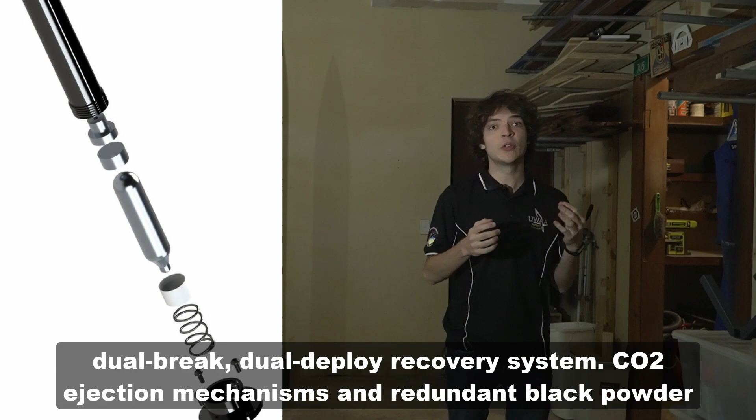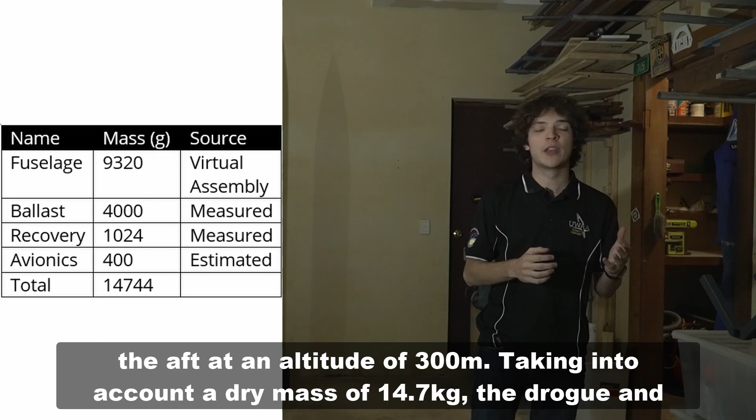Kuka features a dual break, dual deploy recovery system. CO2 ejection mechanisms and redundant black powder charges ensure the ejection of a drogue parachute from the nose at apogee and a main chute from the aft at an altitude of 300 meters. Taking into account a dry mass of 14.7 kilograms, the drogue and the main achieve descent velocities of 23.6 and 7.46 meters per second respectively.

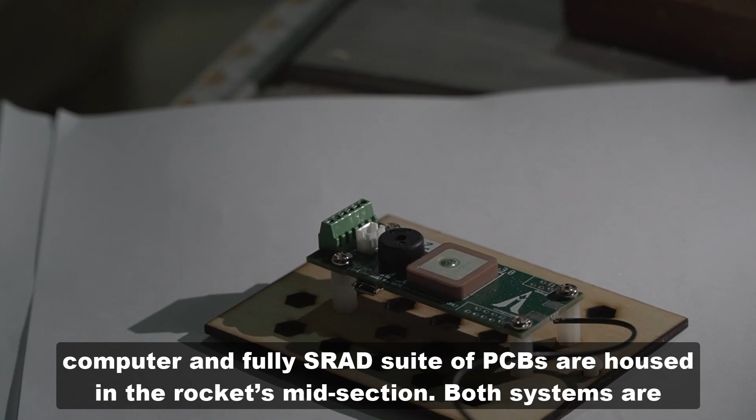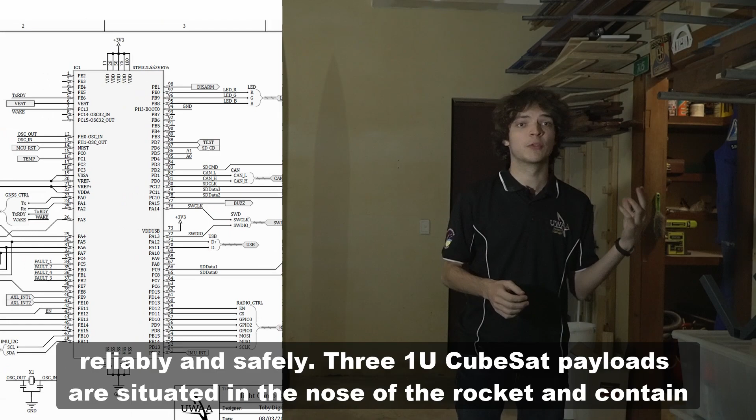A TeleMetrum flight computer and fully SRAD suite of PCBs are housed in the rocket's midsection. Both systems are capable of logging GPS and inertial data, as well as actuating the deployment mechanisms reliably and safely. 3 1U CubeSat payloads are situated in the nose of the rocket and contain adjustable ballast up to the weight of 5 kilograms each, or 15 kilograms in total.

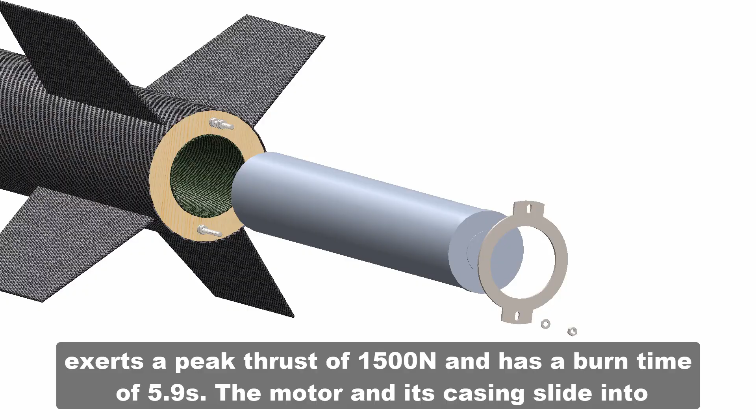The M1290 motor and accompanying Pro 98 3-grain 98mm casing weigh a total of 7.4 kilograms. This motor exerts a peak thrust of 1,500 newtons and has a burn time of 5.9 seconds. The motor and its casing slide into the motor tube from the bottom of the rocket and are secured by a retention plate. The rocket fuselage is split into 3 sections: the aft, the mid, and the nose.

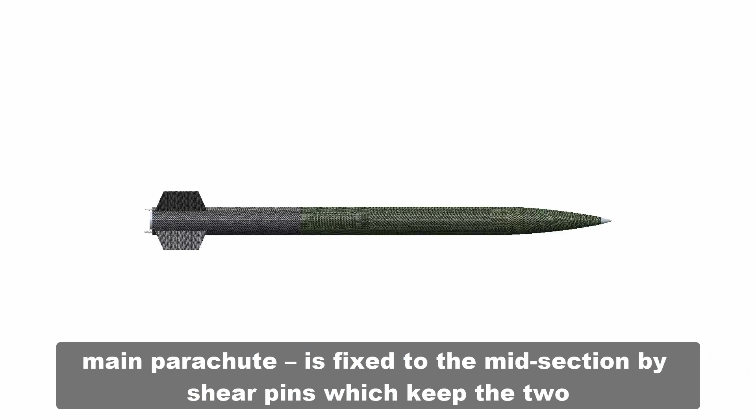The nose, which holds the main parachute, is fixed to the midsection by shear pins, which keep the 2 sections joined until main deployment. The nose has an aluminium tip to protect against temperatures generated when the rocket reaches its near supersonic maximum speed.

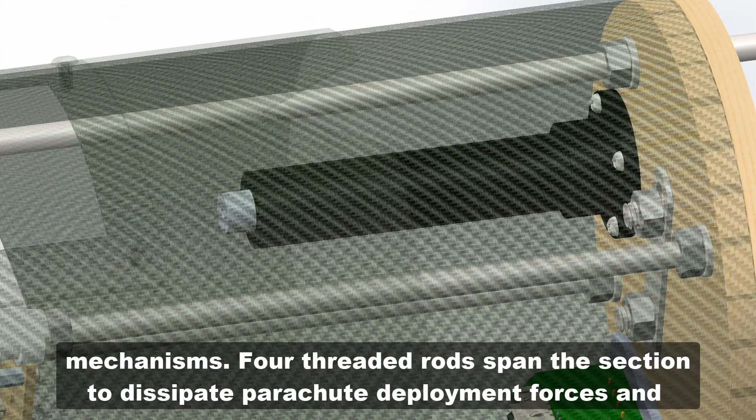The midsection houses the Student Researched and Developed Avionics PCB suite, our commercial off-the-shelf flight computer, and CO2 deployment mechanisms. 4 threaded rods span the section to dissipate parachute deployment forces, and all avionics are mounted onto our modular rack system, which utilizes these threaded rods as attachment points.

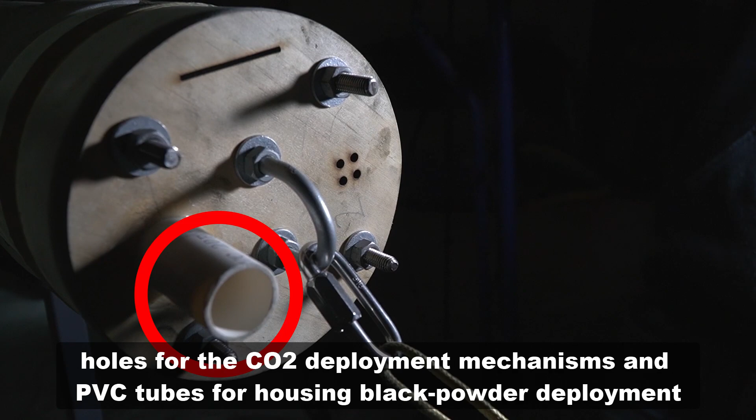Bulkheads are located at either end of the midsection. These feature venting holes for the CO2 deployment mechanisms and PVC tubes for housing black powder deployment charges. Additionally, inbuilt pyro terminals allow for quick attachment of E-matches and an electrical connection through to the midsection.

Through a combination of OpenRocket and SolidWorks, the launch of Kuka on our chosen motor gives a minimum stability of 1.45 cal and a thrust to weight of 5.94.

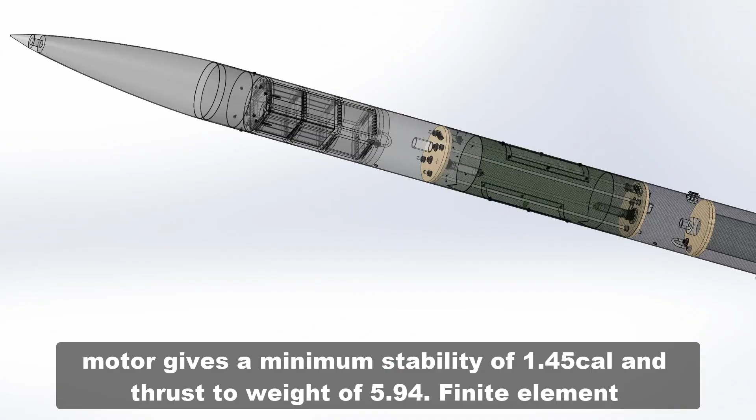Finite element analyses have shown that the engine block and bulkheads exhibit a minimum safety factor of 11.2 across all possible failure modes arising from parachute deployment forces and motor thrust. Hand calculations were carried out using the aeroelastic fin flutter equation to validate the rocket fin thickness and ensure it will not fail due to flutter.

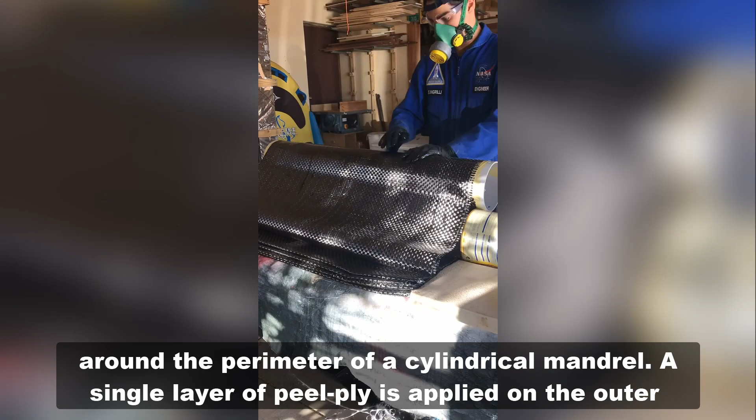All fiberglass and carbon fiber components inside the rocket are hand-laid by the team from fabric and resin. The main fuselage tubes are made by wrapping 6 layers of 200 grams per square meter twill weave fabric around the perimeter of a cylindrical mandrel. A single layer of peel-ply is applied on the outer surface for smoothness, and the composites are left for 24 hours before being cured at 80 degrees Celsius for a further 4 hours.

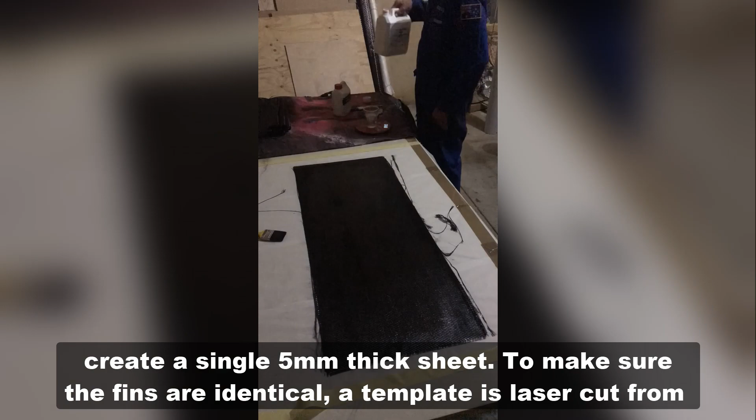The fins are laid up with 12 layers of 250 grams per square meter carbon fiber fabric on a flat surface to create a single 5mm thick sheet. To make sure the fins are identical, a template is laser cut from the plywood and cut exactly onto the carbon fiber fins with a flush cut router.

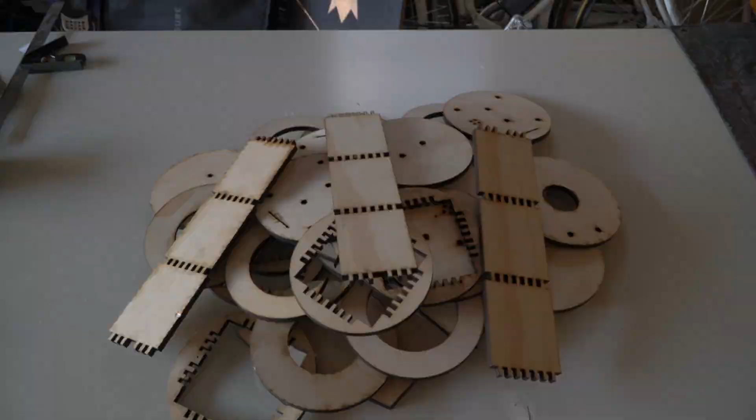Bulkheads, centering rings and mounting fixtures inside the rocket are made from plywood, an inexpensive and lightweight material whose alternating grain pattern offers superior strength and humidity stability compared to regular wood. The laser cutter allows us to manufacture these parts very quickly with a high level of precision.

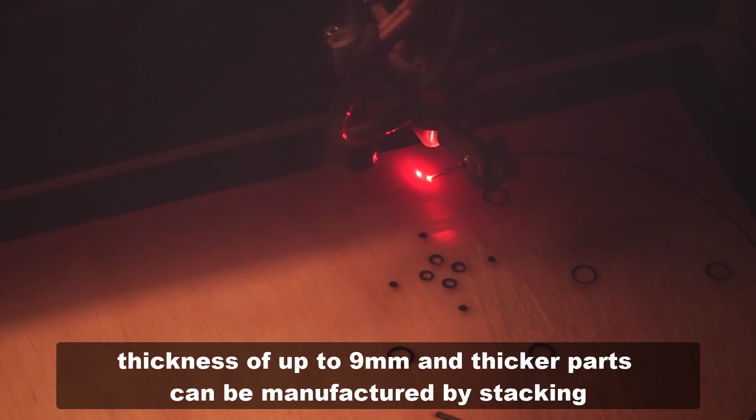The laser can cut a thickness of up to 9mm, and thicker parts can be manufactured by stacking multiple layers and adhering them together with wood glue. Three-dimensional shapes are created from multiple flat pieces through interlocking box joints. All centering rings and bulkheads are secured to the body tubes with 10-hour epoxy fillets.

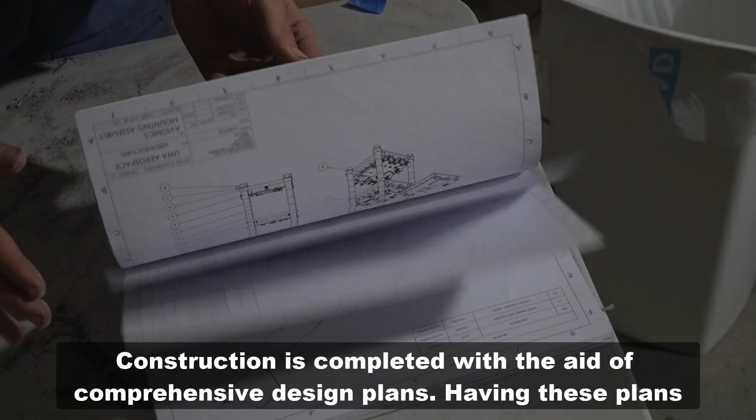Construction is completed with the aid of comprehensive design plans. Having these plans completed before manufacturing has made the process significantly easier.

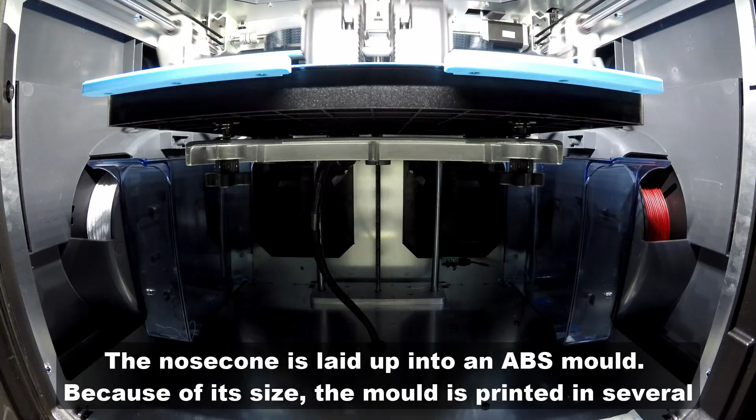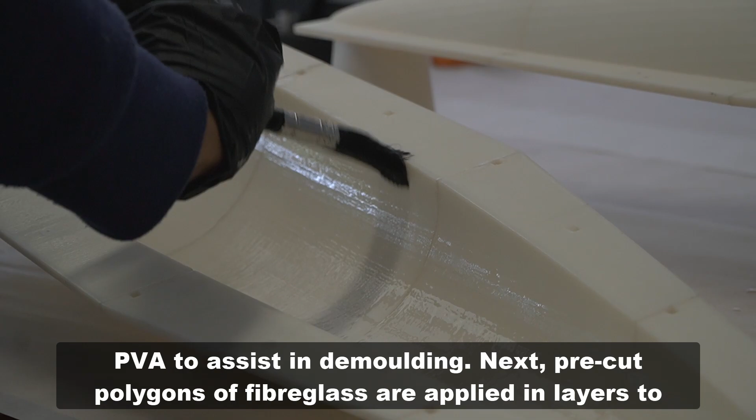The nose cone is laid up into an ABS mold. Because of its size, the mold is printed in several segments before being sanded and superglued together. The mold is then coated in 5 layers of PVA to assist in demolding. Next, pre-cut polygons of fiberglass are applied in layers to the 2 mold halves and adhered with epoxy resin. A lip is left on each half, which is used to join the mold together.

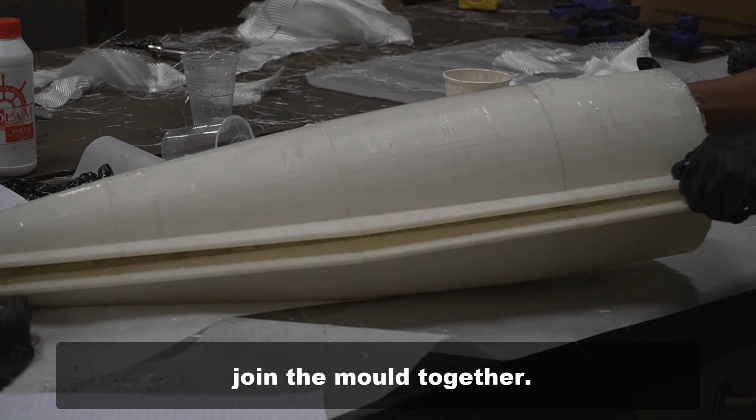This rocket will be recovered with a dual break, dual deploy deployment scheme. At apogee, the aft section of the rocket will separate from the midsection, releasing the drogue parachute. At 300 meters, the nose of the rocket will separate from the midsection to release the main parachute.

A dual break, dual deployment scheme was chosen over any single deployment scheme as it allowed for the inclusion of a drogue parachute that would greatly reduce the drift away from the launch pad with a fast initial descent. UWA Aerospace has also experimented with single break dual deploy mechanisms, and these were found to be less reliable due to the risk of tangling. A dual break mechanism ensures that all recovery components are kept within the body of the rocket until they're released.

The drogue parachute is a semi-ellipsoidal design with 10 gore panels and a spill hole that comprises 4% of the canopy volume. 10 suspension lines are attached to the canopy of this parachute.

The main parachute is a parabolic design and the canopy is made of 6 panels. The design is inspired by Rocketman's high-altitude balloon parachutes. The main parachute has only 4 suspension lines, which simplifies packing and storage procedures and reduces the risk of tangling on inflation. Both parachutes were manufactured in-house.

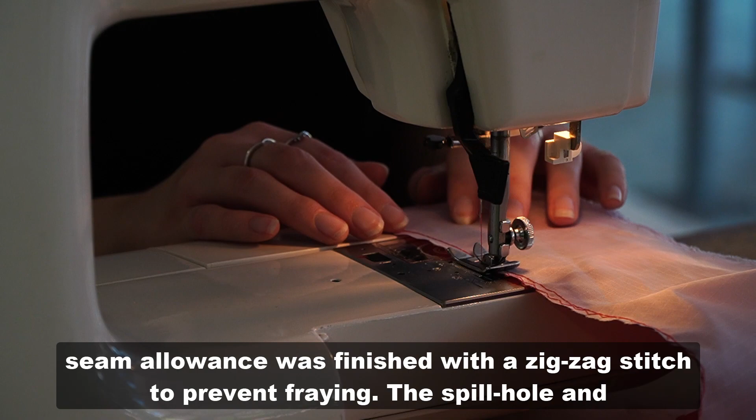The manufacturing of the drogue parachute involved the sewing together of the 10 gore panels with straight seams. Each seam allowance was finished with a zigzag stitch to prevent fraying. The spill hole and the skirt of the parachute were finished with bias binding, also to prevent fraying.

As the main parachute consists of only 6 panels, a stronger seam was opted for. Each of the panels were joined with a felled seam.

A commercial, exhaustless Peregrine carbon dioxide recovery device is used to actuate parachute deployments. A 12-gram unit is used to eject the main parachute, and an 8-gram unit is used for the drogue parachute. Carbon dioxide deployment was chosen over traditional black powder charges to minimize the risk of explosive damage to rocket components.

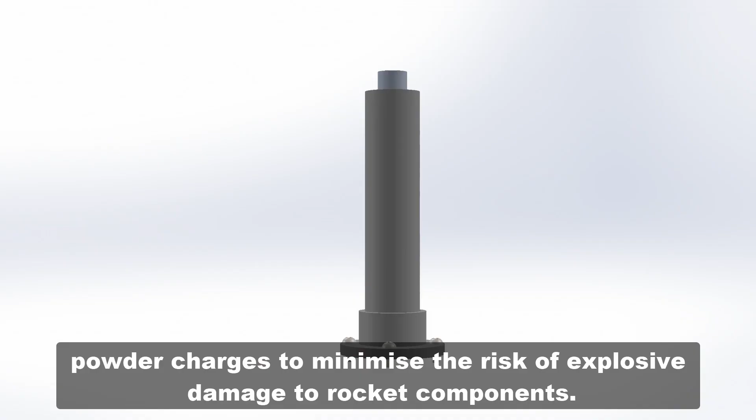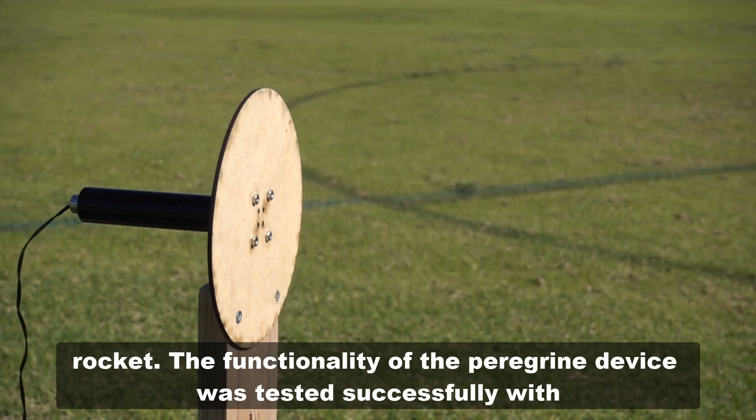The Peregrine works by detonating a very small sealed black powder charge to push the carbon dioxide cylinder into a pin, causing the gas to vent through the bulkhead and separate the rocket. The functionality of the Peregrine device was tested successfully with both 8-gram and 12-gram CO2 cartridges.

The parachutes were wind tunnel tested to confirm their inflation and stability. Both the main and the drogue parachutes were tested here in the University of Western Australia's wind tunnel at its maximum velocity of 7.7 meters per second. The test confirmed that both parachutes were able to fully inflate as expected with no major parachute fluttering.

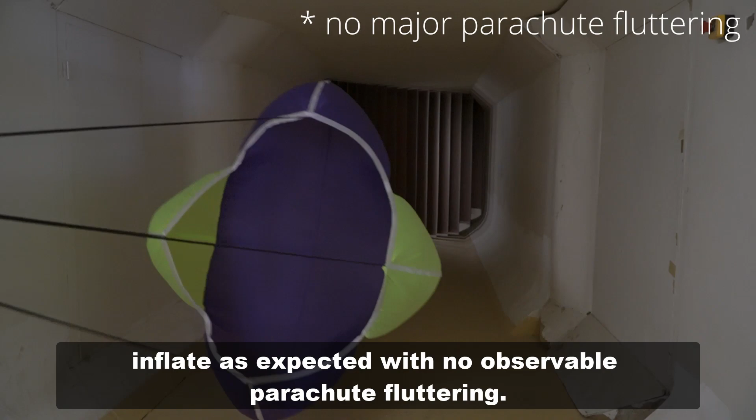Ground testing of primary and backup release mechanisms was also conducted. The CO2 system was able to separate the body tubes of the rocket and successfully eject the parachute. The redundant black powder charge was also successfully tested, and a charge size of 4.25 grams was found to be sufficient.

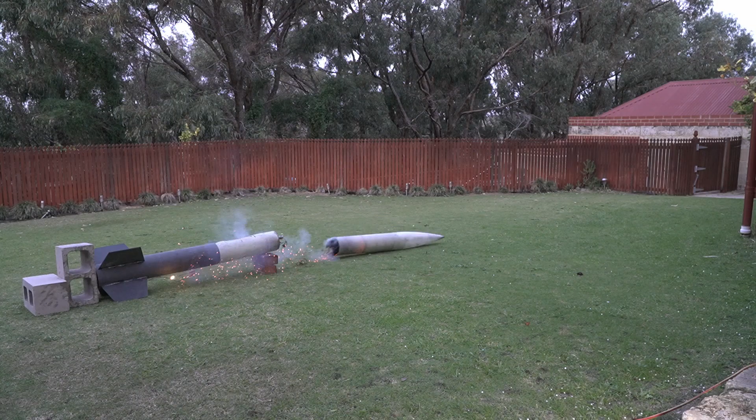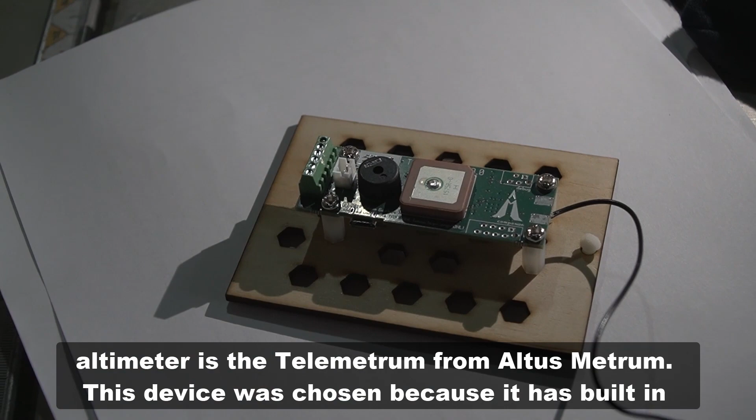The avionics consists of 2 independent systems, one COTS and one SRAD. Our COTS altimeter is the Telemetrum from Altus Metrum. This device was chosen because it has built-in GNSS tracking and a 433 MHz ISM transmitter to provide downlink. Additionally, it can detonate up to 2 E-matches, which is required to operate our dual deploy system.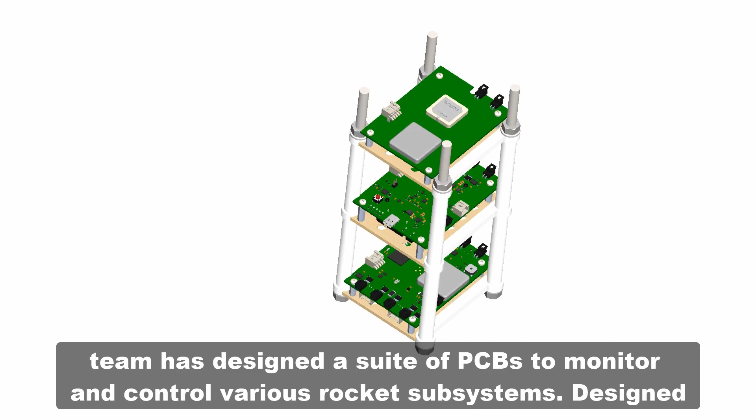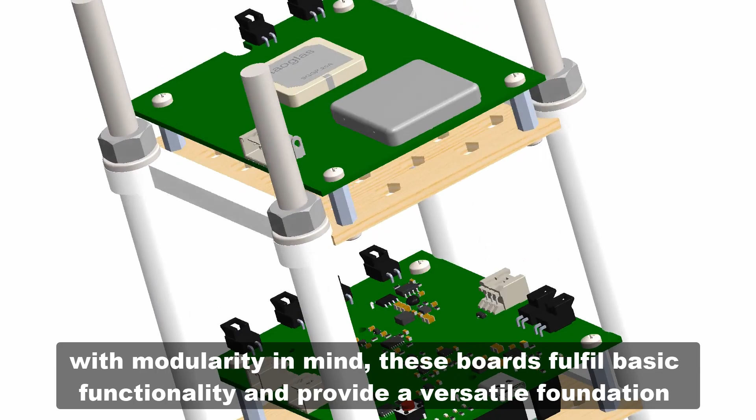The team has also designed a suite of PCBs to monitor and control various rocket subsystems. Designed with modularity in mind, these boards fulfill basic functionality and provide a versatile foundation for future expansions and experimental subsystems. The first of our custom PCBs is the power management system.

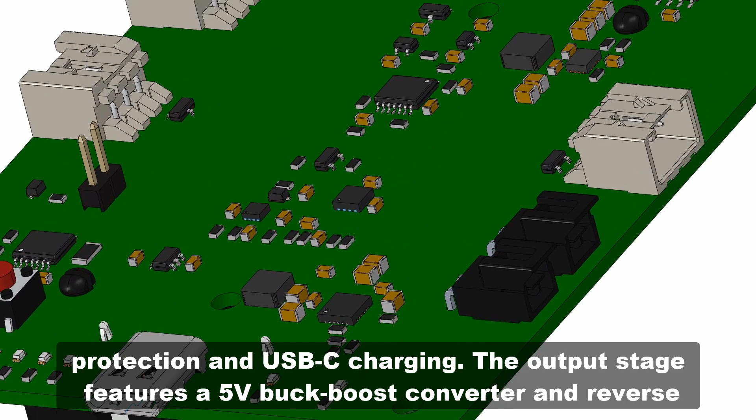This board delivers power to all other modules in the avionics. It features a lithium-ion battery pack with built-in battery protection and USB-C charging. The output stage features a 5-volt buck boost converter and reverse power flow protection. The pack also includes custom switch circuitry, which ensures the system can only be deliberately powered on and off.

The heart of our SRAD system is the Altimeter PCB. This module includes a powerful microcontroller which reads sensors, performs flight calculations, and operates the dual deploy parachute system using our custom designed E-match ignition circuitry, which is optimized for reliability and safety.

The functionality of the altimeter can be extended to include tracking by connecting it to our GNSS receiver module. This board includes a large patch antenna designed to maximize received signal power and maintain satellite lock.

To break out E-match connections, we have developed a feed-through PCB which is assembled onto the bulkhead. Terminal blocks either side of the bulkhead allow energetic devices to be connected inside or outside the avionics bay.

Our system facilitates modularity with a few key features. The first is the ability to daisy-chain modules together through the power supply lines, which allows an arbitrary number of modules to be connected in parallel.

Additionally, the altimeter also features a CAN bus, which provides an interface for it to control any future expansions to the system. All connectors in the system include mechanical latching mechanisms to ensure they cannot be disconnected by vibrations or high acceleration events experienced by the rocket.

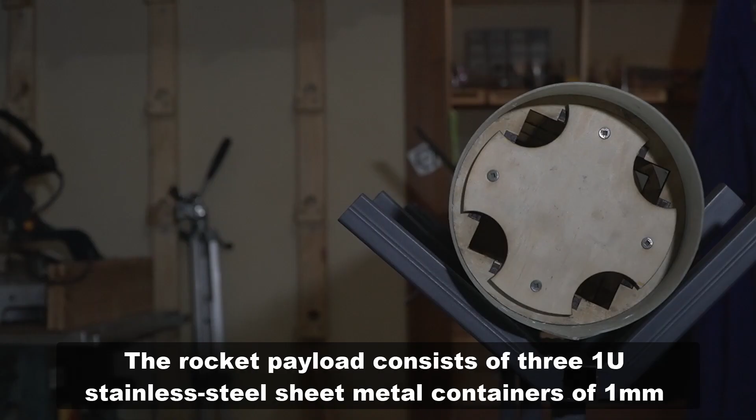The rocket payload consists of three 1U stainless steel sheet metal containers of 1mm thickness. Each container features dividers that allow for partial filling while maintaining a mass distribution that is symmetric about the longitudinal axis of the rocket. The containers are held in a plywood fixture that is glued to the upper body tube and are sandwiched between layers of foam that dampen movement during flight.

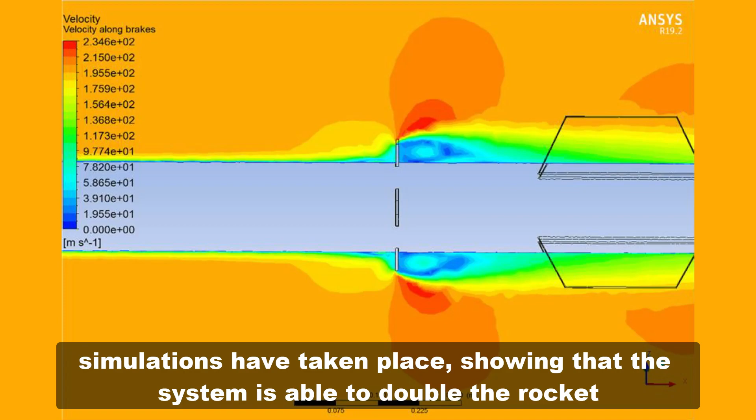The rocket flight was simulated on OpenRocket with a drag coefficient profile that has been produced on RASAero. We use a combination of both software since OpenRocket has a more user-friendly interface, but RASAero is more accurate at predicting the drag coefficient for transonic flow regimes.

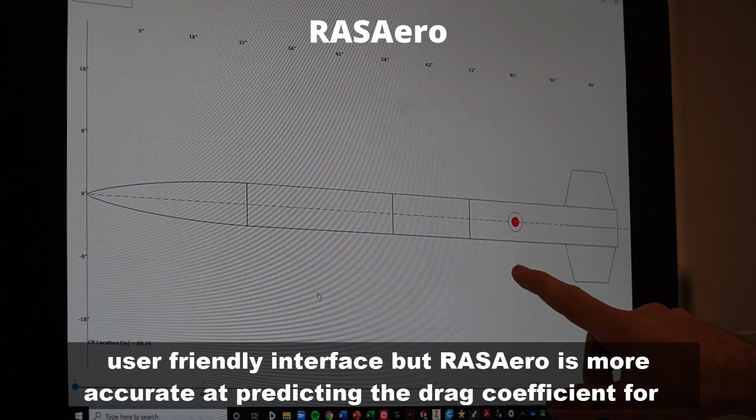Since trajectory simulations are carried out before the rocket is built, the mass of the rocket isn't known and we have to estimate it. An estimate of the entire fuselage mass and center of mass position is created from our virtual CAD assembly, which has the material density of every component inserted.

A total dry mass of 14.7 kilograms was overridden in OpenRocket, along with the center of mass position, and then we did a simulation on the M1290 motor.

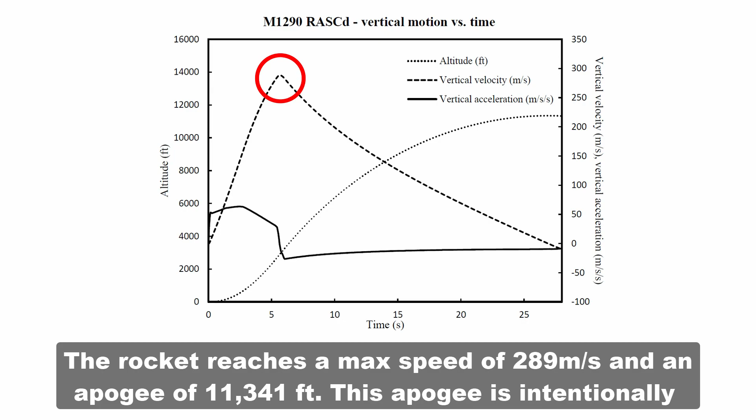The rocket reaches a maximum speed of 289 meters per second and an apogee of 11,341 feet. This apogee is intentionally over the 10,000 feet so the air brakes can reduce it.

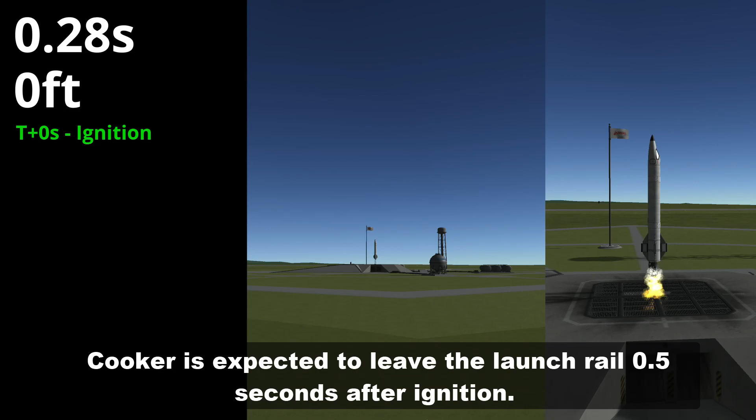KUKA is expected to leave the launch rail 0.5 seconds after ignition. It hits max Q 5.4 seconds later, followed by burnout of the motor after an additional 0.2 seconds.

The video you currently see on screen is a demonstration of our rocket's flight.

After hitting max Q, the air brake system will power on. The system references its current speed and altitude to that generated by a simulation reaching 10,000 feet with the brakes half actuated. It then adjusts its speed through actuation of the brakes.

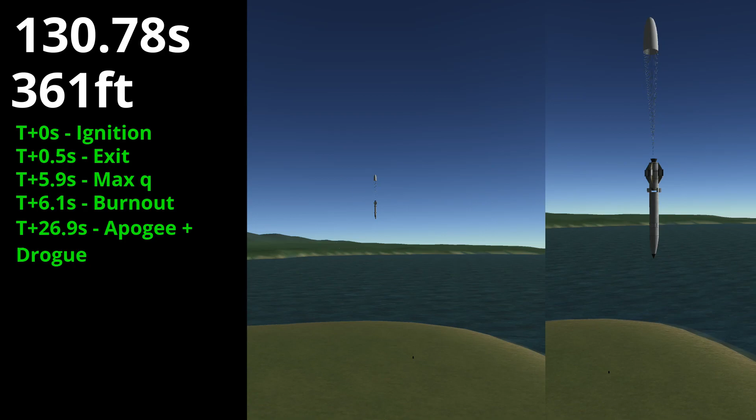At apogee, the primary ejection systems fire. This deploys the drogue parachute and the rocket begins its descent. At 300 meters, or around 1,000 feet, the secondary ejection systems fire, deploying the main parachute in preparation for landing.

Whether it be the designing, building, or testing of KUKA, this rocket and this competition have been an extremely valuable experience for the team. Being able to get neck deep in rocketry once again after the pandemic-induced drought across 2020 has created a lot of motivation and excitement for our new members and reminded us older members why this field is so much fun.

KUKA has allowed us to push further towards our goal of having an entirely SRAD rocket and also allowed us to test new ideas and refine existing ones.

Through our modular design approach and detailed documentation, we believe that this rocket serves as an extremely versatile basis for future projects with future team members.